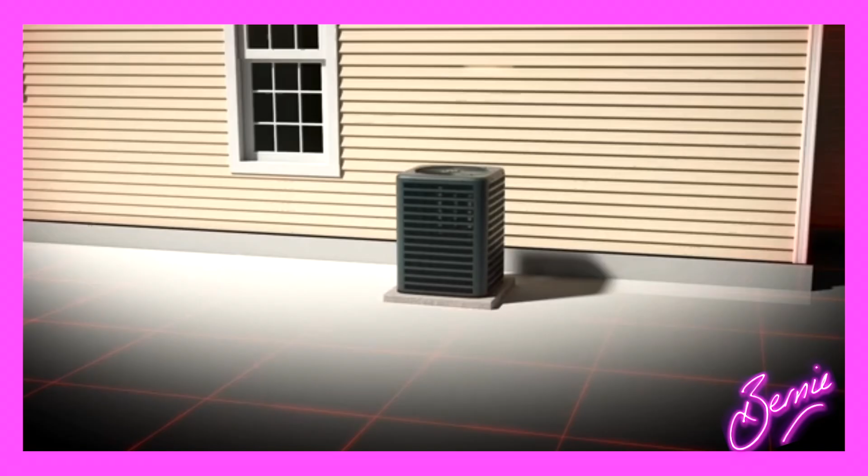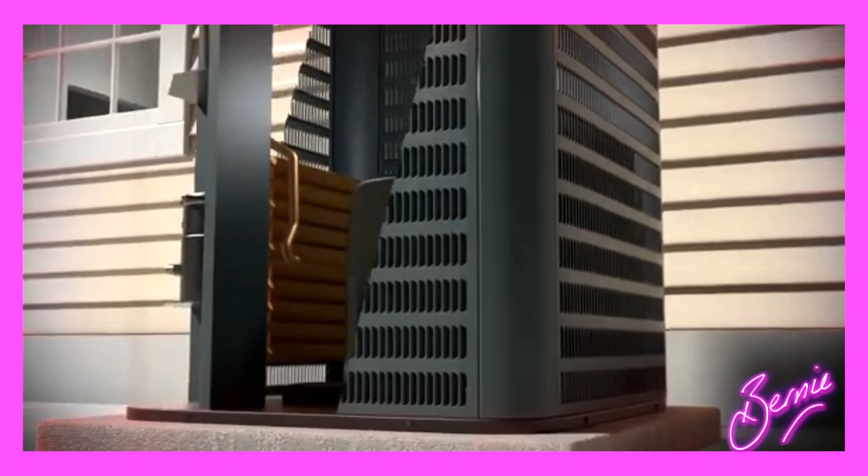So let's start with how heat pumps are supposed to work. I'm sure that lots of people do know, but many probably don't. So instead of burning fossil fuels to generate heat, they move it, and they work like a kind of a fridge in reverse, pulling heat from the outside and bringing it into your home, or the other way around if you use it as an air conditioning unit.

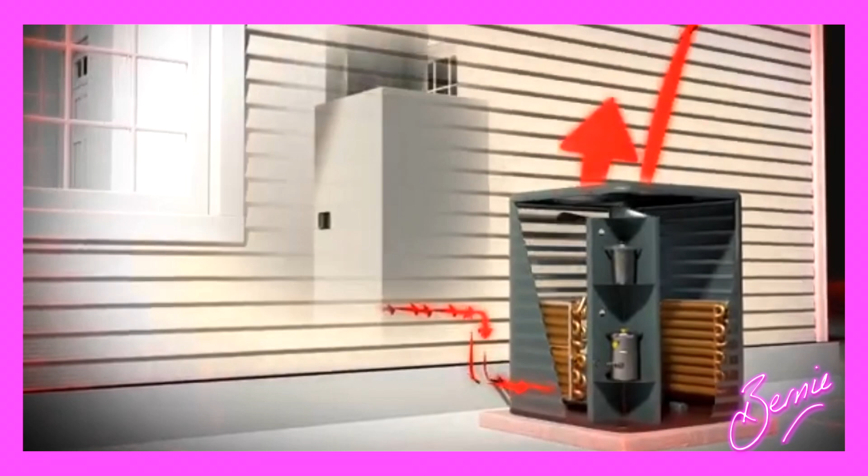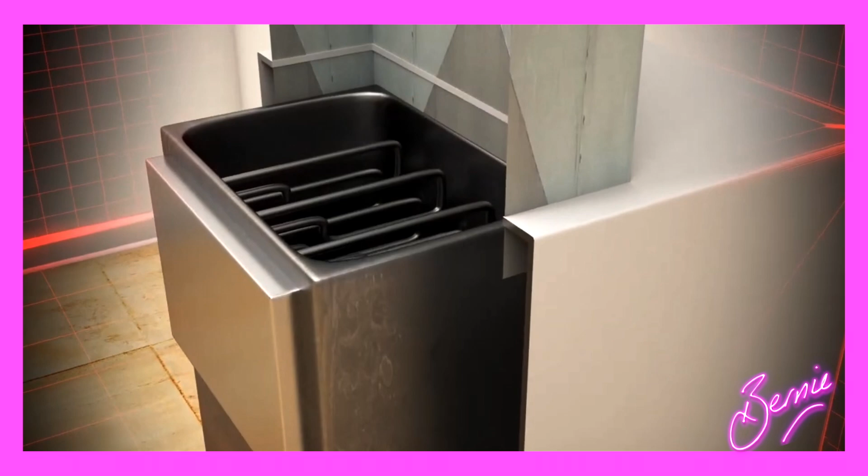Now, I know that sounds a bit mental, because if it's colder outside to start with, then how can that cold air be moved around to become warm air? Well, here's the science bit, favourite part, as you know. The science lies in a chemical substance inside the heat pump that's called a refrigerant. And this fluid has a very low boiling point, so it can evaporate and turn into a gas at much lower temperatures than something like water. The process works a bit like the cooling system in your fridge.

Refrigerant. It is a chemical. How's that for the environment? Well, refrigerants come at an enormous environmental cost. Most modern refrigerants, like things called HFCs, have very high global warming potential, meaning they can trap heat in the atmosphere much more effectively than carbon dioxide, which we're supposed to be getting rid of. And the more of these heat pumps we install, the bigger the problem will get.

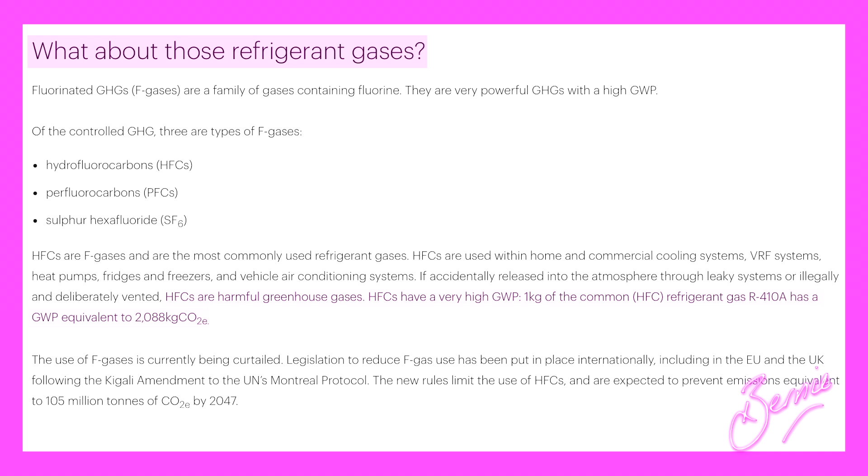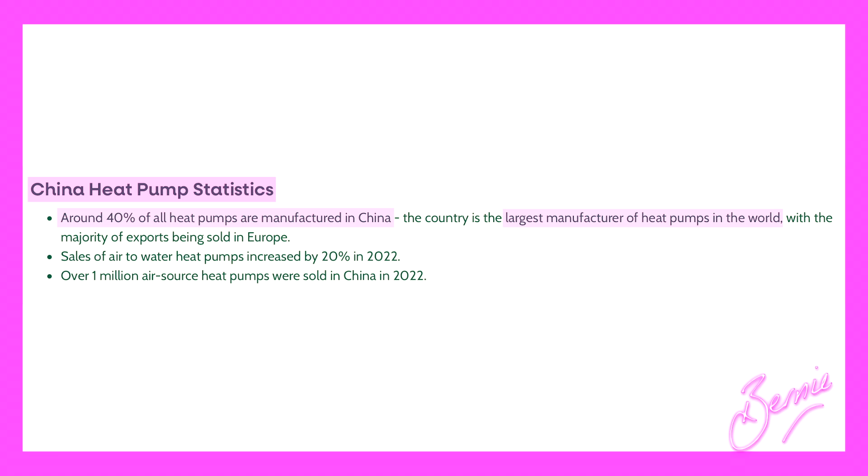And yes, almost all of the heat pumps installed in the UK are made in China, or their components are made in China, using vast quantities of coal and oil. Anyway, I've digressed. Let's get back to how it works. So, the refrigerant inside the heat pump absorbs heat from the outside air, even in temperatures as low as 0 degrees or colder. Once the refrigerant turns into a gas, it's compressed by a compressor inside the heat pump, and the compression increases the temperature of that gas dramatically, much higher than the outside air.

And then this hot pressurized gas is passed through a heat exchanger inside the heat pump, where it transfers its heat into the air or water that's used in your radiators. And as it loses the heat, the gas cools down, turns back into a liquid, and the whole cycle starts again. Sounds great, right? Even in cold temperatures, the refrigerant inside the pump can still absorb the heat from outside. So, for example, air source heat pumps are designed to extract heat from the air, even when it's as cold as, say, -15. But here's the problem.

The colder it is, though, the harder the system has to work, which is why it's so much more expensive to run, because it uses so much more electricity. Now, the government wants you to believe that heat pumps are efficient because they don't generate heat, they simply move it. That's their argument. And in a brand new standalone home, not next to neighbours, and with perfect insulation, the system can actually work quite well, as long as you only want to heat it to 19 degrees.

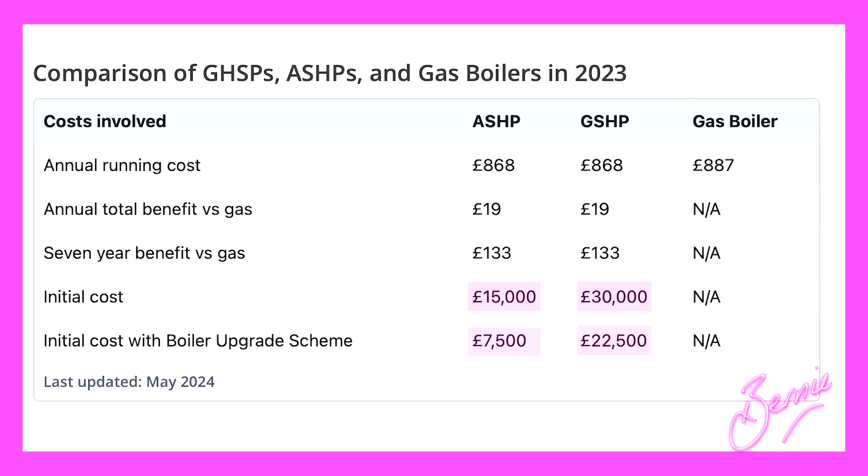So let's consider those costs then, should we? An average heat pump will cost anywhere between £14,000 and £19,000. And if you want a ground source heat pump, why would you ever? That's going to cost you up to about £34,000, depending on how much work you need done. Compare that to traditional boilers. A gas boiler, on average, will cost between £3,000 to £5,000, and oil boilers come in even cheaper than that, at £2,000. The government has had to change the rules slightly so that more houses can get permission for heat pumps in the first place.

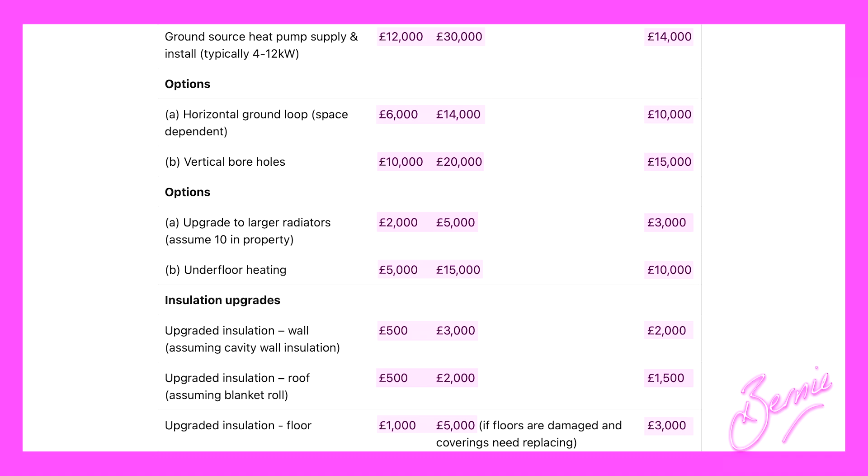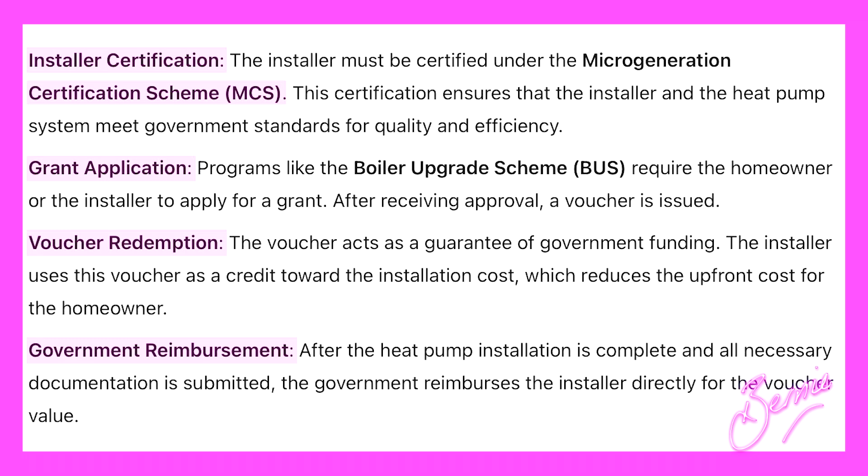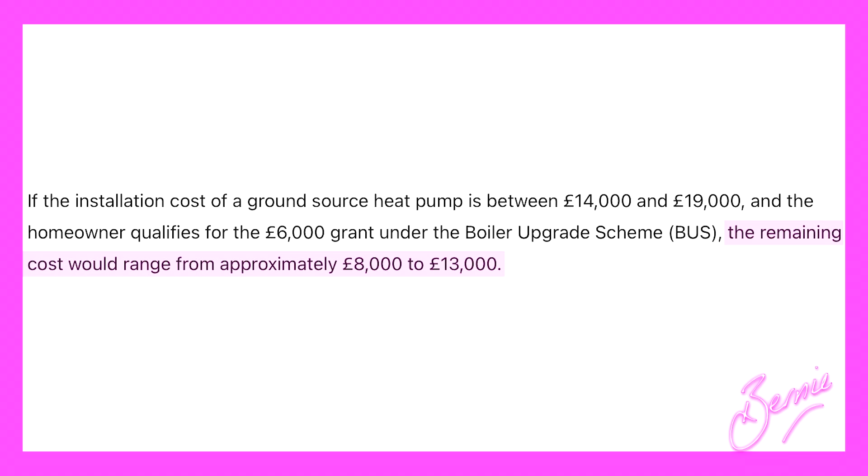And when you do get permission, which you need, you'll be given a certificate, which the supplier then redeems as a voucher worth £7,500 from the government, from taxpayers' money, leaving the homeowner with a total cost of between £7,000 and £8,000, which is still much more expensive than either the gas or the oil, at a time when energy prices are continuing to rise and the cost of living is continuing to rise. And don't forget, these subsidies given to those installation businesses are paid for by you in your taxes anyway. The government aims to install 600,000 of these pumps, which is a total tax cost of £4.5 billion of your donations to net zero. How do you feel about paying for half of your neighbour's heat pump? I don't feel great about that.

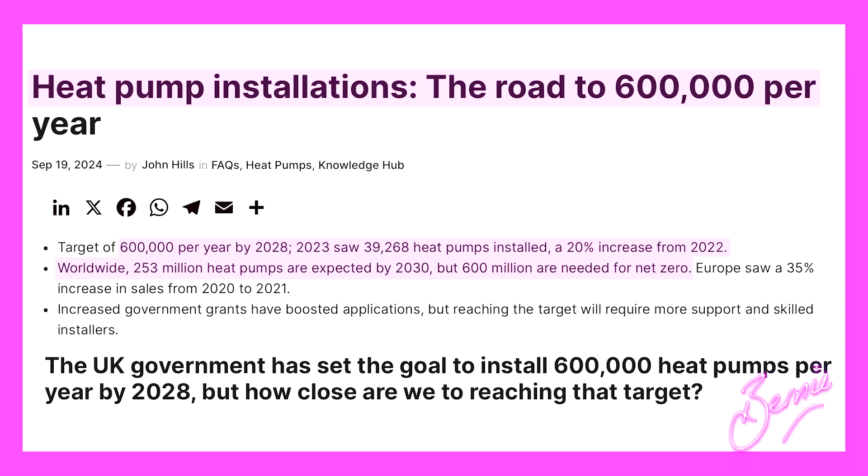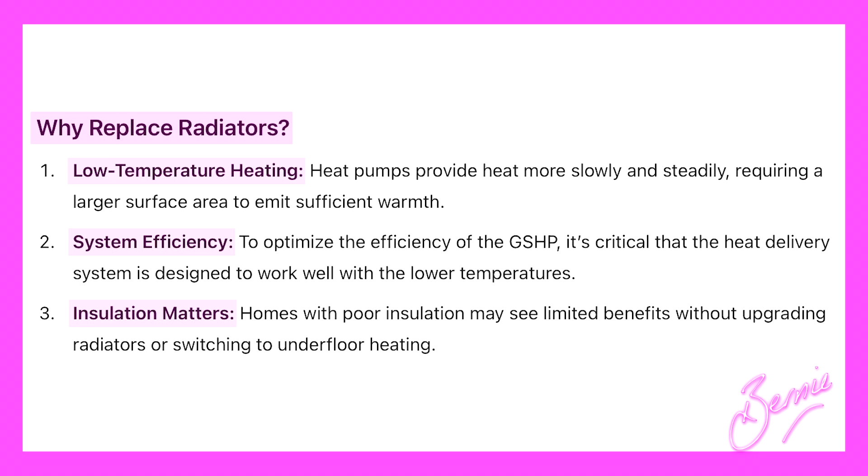And then there's the problem of your radiators, because if you do have an older property with traditional radiators, they're not up to the task. Heat pumps operate at much lower temperatures, so your current radiators won't be able to provide enough heat, which means you might need to upgrade all of the radiators in your house in addition to the cost of the heat pump. But what about the actual experience of having a heat pump in your home?

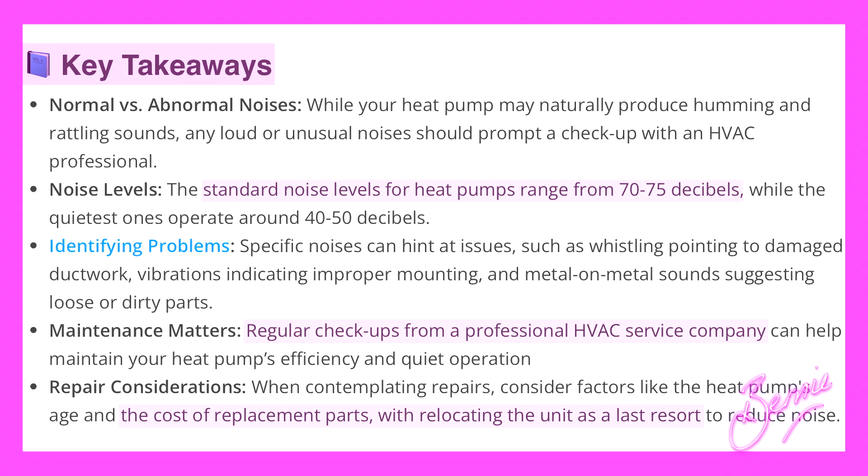Well, let's talk about that. The government has decided to lower its noise restriction levels so that they can increase sales of these monstrosities. Well, how loud are they? Up to about 70 decibels, which is the same as a vacuum cleaner. So imagine a vacuum cleaner running outside your kitchen window 24 hours a day, 365 days a year, for years. And now imagine living on a traditional British street full of terraced houses, or in an apartment surrounded by other apartments. Gardens and balconies are going to be filled with the chorus of buzzing rather than any sort of birdsong. And whilst that might drown out the Sunday morning lawnmowers, it's not exactly peaceful.

And there's more, because heat pumps don't just make noise, they also pump out freezing cold air. Like your fridge pumps out warm air at the back, they, when they extract heat, push air that is much, much colder than the ambient temperature outside, as low as -7 degrees, just like the inside of your freezer. So imagine living in that row of terraced houses, rows of heat pumps all kicking out freezing cold air and sounding like a chorus of vacuum cleaners. Not exactly the relaxing environment you had in mind for your barbecue.

And it's not just inconvenient for you, it has an impact on wildlife too, especially in the spring when animals rely on the warmth from the sun in your garden to keep them warm. So how is that environmentally friendly or green? It isn't. It isn't either of those things. And then there's the murky bit. They definitely don't tell you this in the sales pitch.

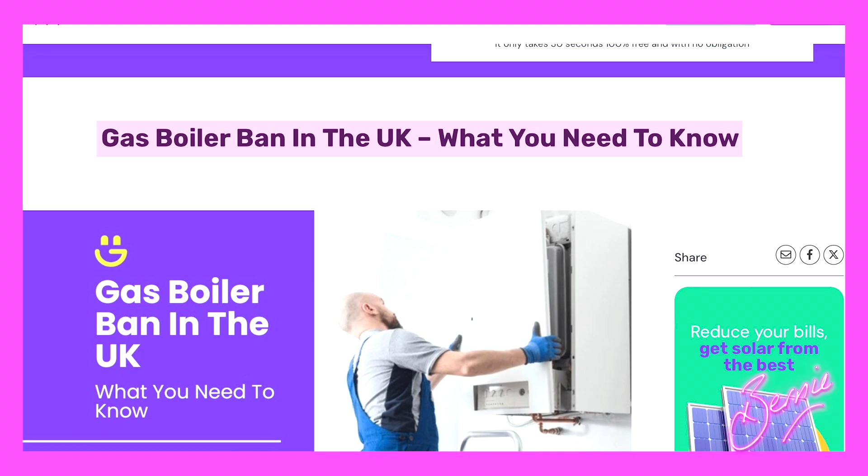The government is heavily subsidising heat pump companies, but they're not offering similar support for any traditional heating systems, so they're messing with the free market. They're actually penalising those people who want to stick with gas boilers by increasing their costs and imposing stricter regulations, putting a tax on your choice. And they will continue to increase the price of traditional boilers until they're the same price as the air source heat pumps, taking away your choice and forcing and fiddling in your market.

Not only that, but many housing developers are being refused planning permission to install heat pumps because the local electricity grid is already overloaded. For example, in Reading, developers can't get the green light for new homes with heat pumps because the grid can't handle the extra demand. And this isn't an isolated case. If the UK government has set a target of 600,000 heat pump installations per year by 2028, how on earth is the grid going to handle that kind of load? It's going to cause serious problems, and it's going to cause serious restrictions.

The government is pushing for this massive rollout of heat pumps without addressing the infrastructure. It's a classic case of good intentions colliding with complete reality, ideology overriding facts. And the fact is that for the vast majority of homes, heat pumps just aren't a good idea, even on paper. They're expensive to install, costly to run, noisy, disruptive, and not as effective in the vast majority of non-new build homes as normal, traditional boilers.

Add that to the strain placed on an already overloaded grid, and the government's push for widespread uptake looks less like a solution and more like another one of Ed's expensive experiments, where we are the ones being experimented on. And history shows us that government intervention in free markets rarely leads to success. When you subsidise one technology whilst penalising others, whilst you have a crumbling infrastructure, it's a recipe for absolute disaster. People just won't take up this technology that gives them a worse standard of living. So in the end, the government will force you.

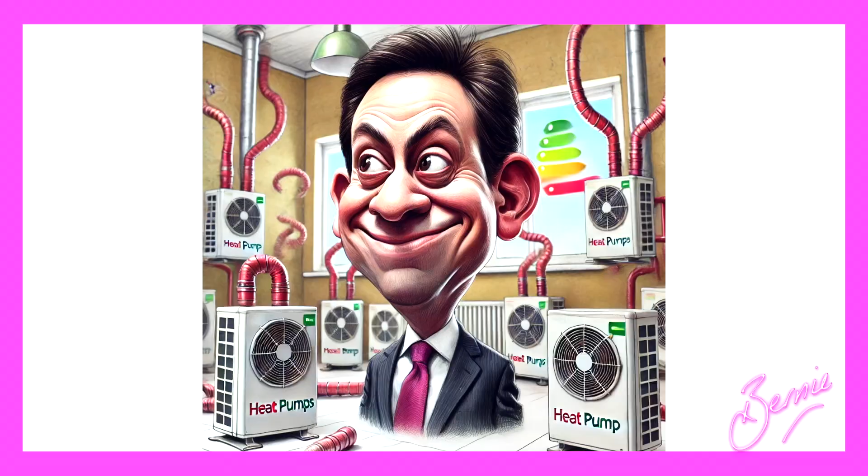So again, I'm telling you, it's time to talk to Ed. It's time to write to your MPs. We need to demand action because the time for silence and propaganda about net zero is over. It's at an end.